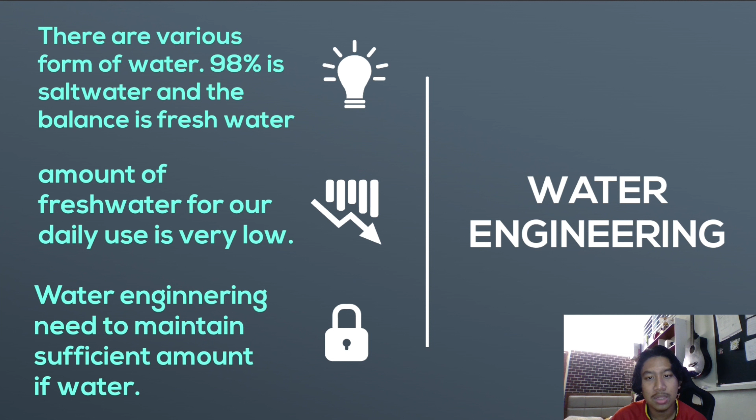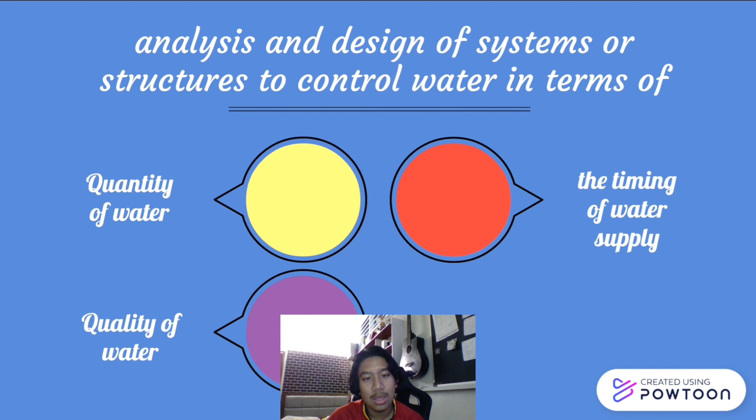Next, what is water resource engineering? It is a field of analysis and design of systems or structures to control water in terms of quantity of water, quality of water, the timing of water supply, and distribution of water. There is a system in water resource engineering able to treat, store, and convey water to where it is needed, when it is needed, and for the purpose it is needed.

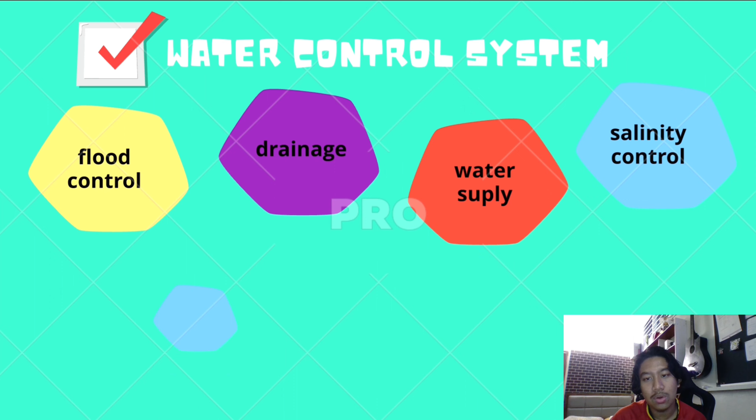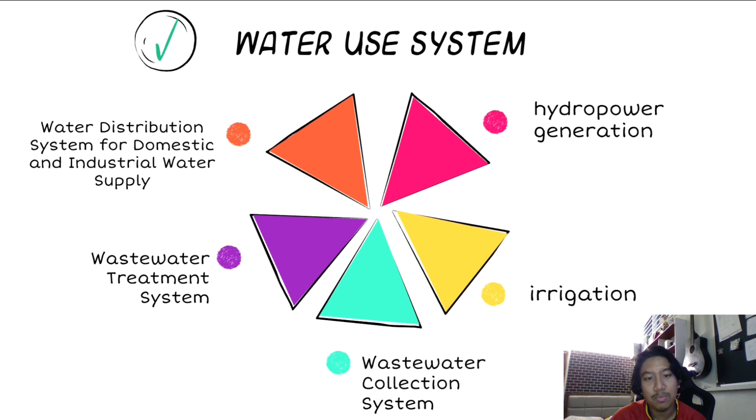These systems are divided into 2 categories: water control system and water use system. For water control system, it consists of flood control, drainage, water supply, salinity control, sediment control, pollution abatement, and ship navigation. Second, in terms of water use system, they manage water distribution system for domestic and industrial water supply, wastewater treatment system, wastewater collection system, irrigation, and hydropower generation. All of these systems are important to gain source of water and maintain the supply of water to residential areas.

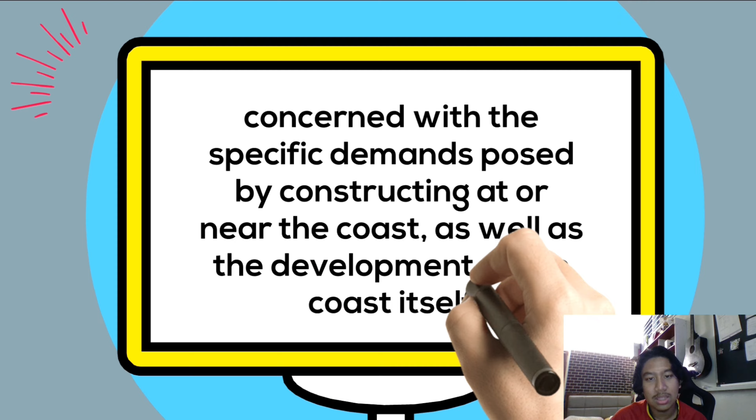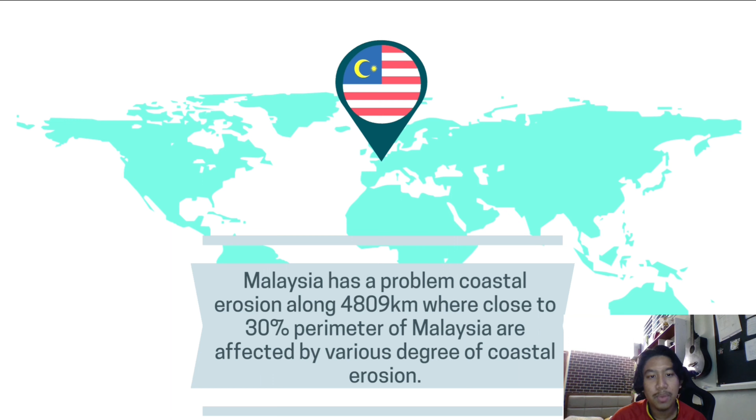Next, the speaker also shares about coastal engineering, which is a branch of civil engineering concerned with the specific demands posed by constructing at or near the coast, as well as the development of the coast itself. Malaysia had a problem with coastal erosion along 4,809 km, where close to 30% of the perimeter of Malaysia are affected by various degrees of coastal erosion. The hydrodynamic impact, especially waves, tides, storm surge, tsunami, and also the harsh environment of salt seawater are typical challenges that lead to coastal erosion, requiring coastal engineers to solve this problem.

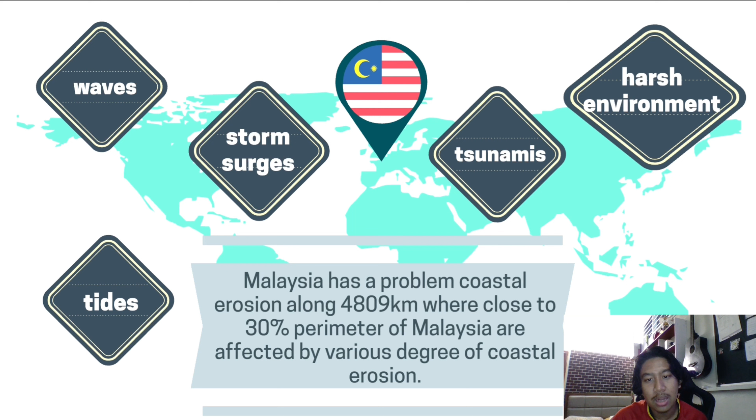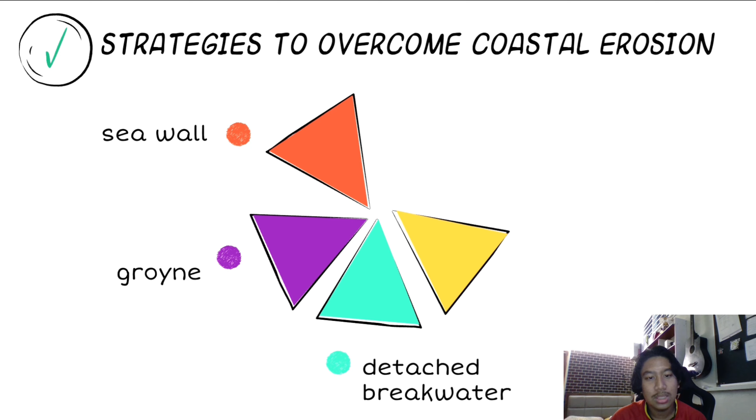There are a lot of strategies to overcome this coastal erosion, such as sea wall, groyne, detached breakwater, submerged breakwater, and beach nourishment.

What is structural engineering? Structural engineering is a subdiscipline of civil engineering in which a structural engineer is trained to design the bones and joints that create the form and shape of man-made structures such as buildings, houses, and many more. Basically, structural engineers are required to design a structure that can withstand the stresses and pressures imposed by environmental conditions and human use. They also need to ensure the building or other structure does not deflect, rotate, or vibrate excessively or collapse, and will remain stable and secure throughout their use.

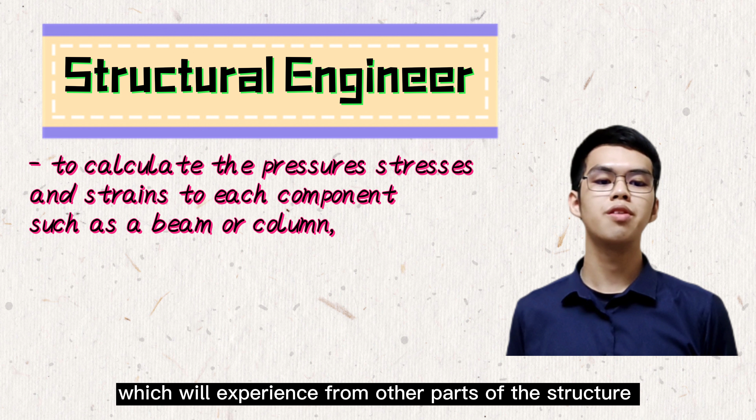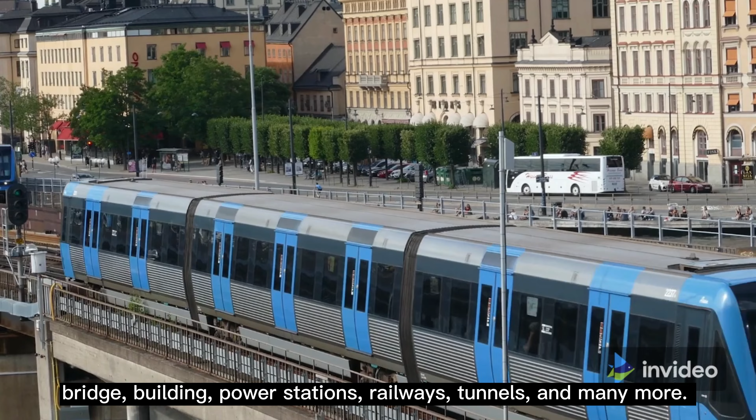Hence, they are required to calculate the pressure, stresses, and strain to each component such as beam or column, which will experience from other parts of the structure due to human use or environmental pressures such as weather or earthquake. Examples of civil engineering structures are dams, bridges, buildings, power stations, railways, tunnels, and many others.

I'm going to share what is environmental engineering. For your information, environmental engineering is a professional engineering discipline that combines broad scientific disciplines such as chemistry, biology, ecology, geology, hydraulics, hydrology, microbiology, and mathematics. It is to develop solutions that protect and improve the health of living organisms while also improving environmental quality.

Environmental engineering is also the use of scientific and engineering principles to improve and manage the environment in order to protect human health, maintain natural ecosystems, and promote environmental-related improvement of human life. Wastewater management, water and pollution control, recycling, waste disposal, and public health are all handled by environmental engineers. They create plans to prevent water infections and promote sanitation in urban, rural, and recreational areas, as well as water supply and industrial wastewater treatment systems.

They study hazardous waste management systems to determine the severity of such risks, provide treatment and containment recommendations, and propose laws to avoid disaster. They put environmental engineering law into practice, such as determining the environmental impact of proposed construction projects.

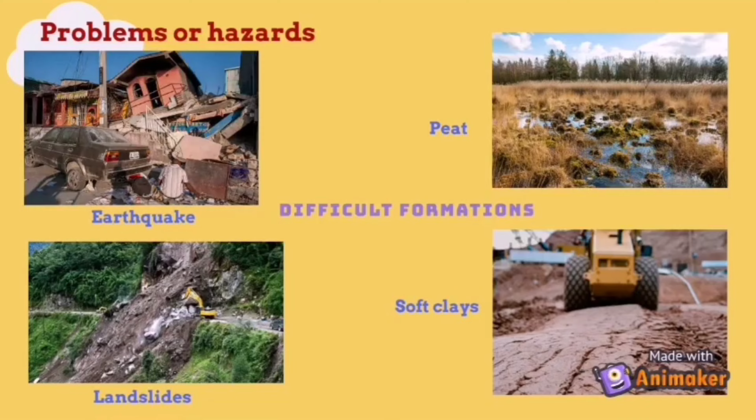From the assignment, I have learned issues of civil engineering related to geotechnical and transportation, such as tsunami, landslide, and transport congestion. Geotechnical issues: problems or hazards include earthquakes, landslides, and difficult formations such as peat and soft clays. The risk of geologic problems and hazards such as earthquakes, landslides, and floods must be translated into project cost.

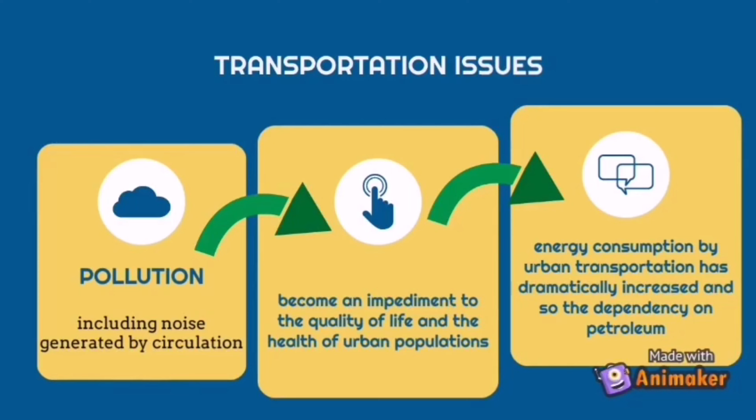Transportation issue: pollution, including noise generated by circulation, has become an impediment to the quality of life and even the health of urban populations. Further, energy consumption by urban transportation has dramatically increased, and so has the dependency on petroleum. I also have studied all the factors and impacts and the ways to solve the issue.

Next, for the assignment of the hydraulic lecture, the first question asks for an example that can give a big environmental impact. So the summary answer is: using fertilizer in large amounts can lead to a huge environmental impact on water-related systems, which is eutrophication. There will be an amount of fertilizer absorbed by soil and flow into underground water. In consequence, the plants and algae underwater will die and couldn't do the photosynthesis process to produce food. Therefore, we should minimize the use of fertilizer in order to protect the underwater ecosystem.

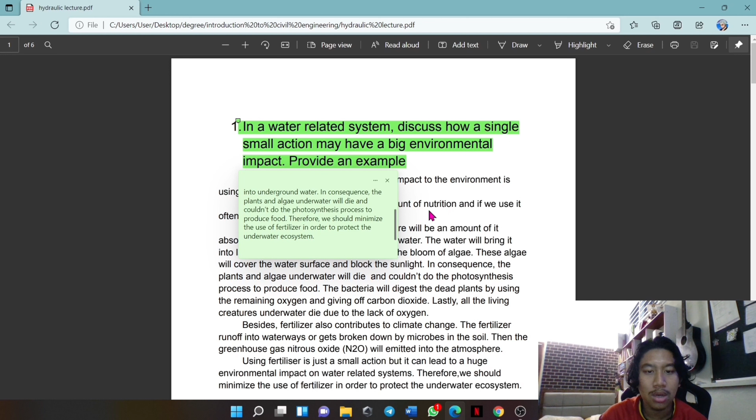Next, second: what human activities can cause problems in watersheds? So the answer is, one of these problems is stormwater pollution. Humans always throw garbage everywhere, and when stormwater comes, it will flow into rivers and oceans. It will harm underwater livings. To avoid the problem, we can set up more garbage cans in public and enforce stricter rules.

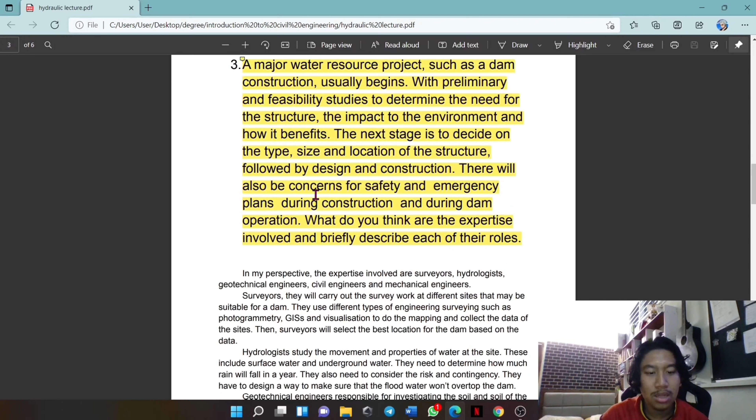Next, what expertise is needed to manage a construction? So the answer is, the expertise involved are surveyors, hydrologists, geotechnical engineers, civil engineers, and mechanical engineers.

Next, state coastal forces and coastal physical features. So the answer is, the coastal forces are waves, currents, and tides. The coastal physical features are coastal bathymetry, coastline features, and sediment characteristics. Basically, these factors will strike the shore sediment and wash it away.

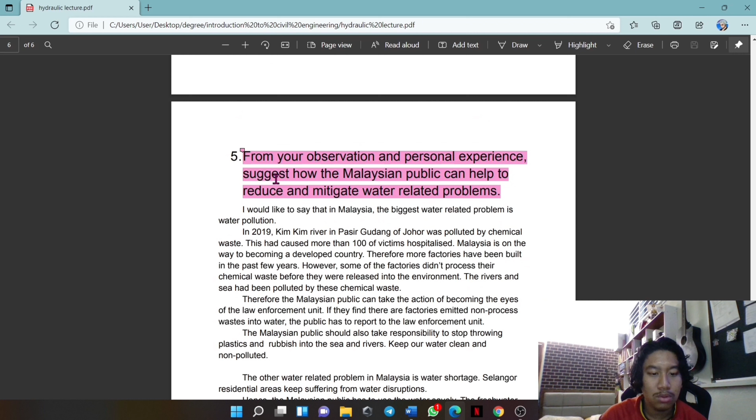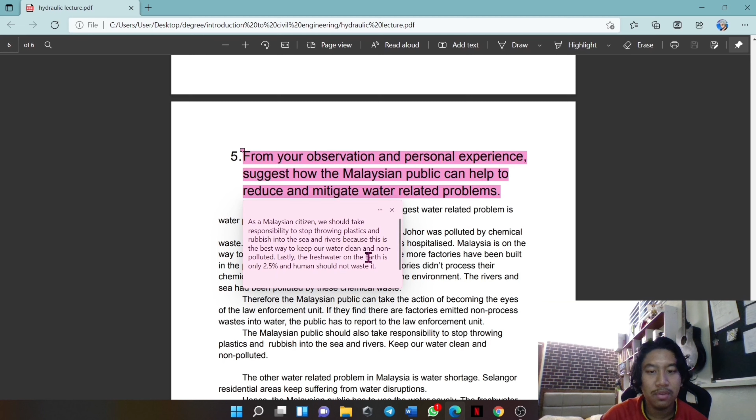So for the last question: how to reduce water related problems? The answer is, as Malaysian citizens, we should take responsibility to stop throwing plastics and rubbish into the sea and rivers, because this is the best way to keep our water clean and non-polluted. Lastly, fresh water on Earth is only 2.5%, and humans should not waste it.

The assignment requires us to find a building in our town which has a 3-story height or higher. We are required to prepare a report which includes explanation of the architecture concept of the building, the structural system of the building, the highlight of selected structural elements with interesting features, material use, and lastly the additional features if any.

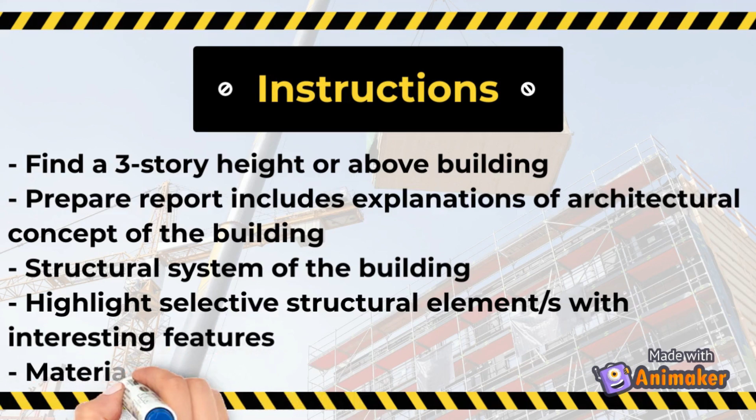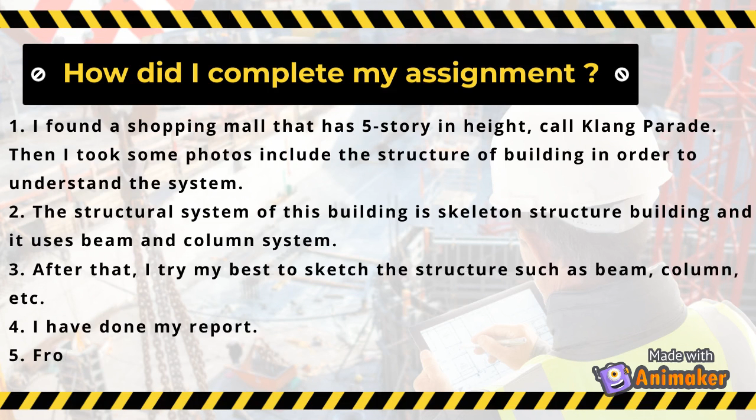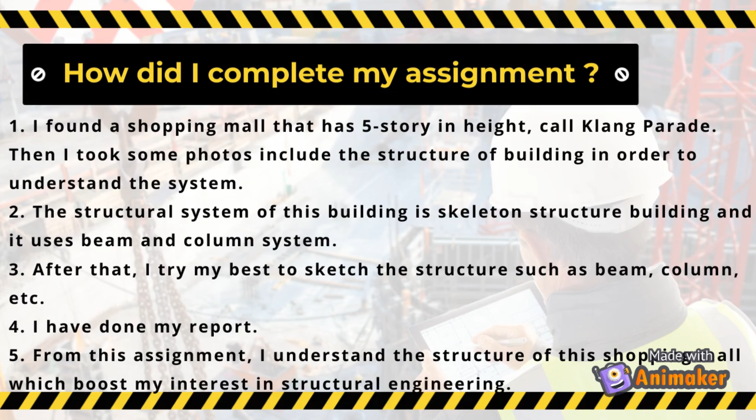Firstly, I found a shopping mall near my house that has 5-story height which is called Klang Parade. Then I took some photos including the structure of the building in order to understand the system. According to my understanding, the structural system of this building is a skeleton structure building and it uses a beam and column system. After that, I tried my best to sketch the structure such as beam, column, and many more. Finally, I have done my report. From the assignment, I understand the structure of this shopping mall, which can boost my interest in structural engineering.

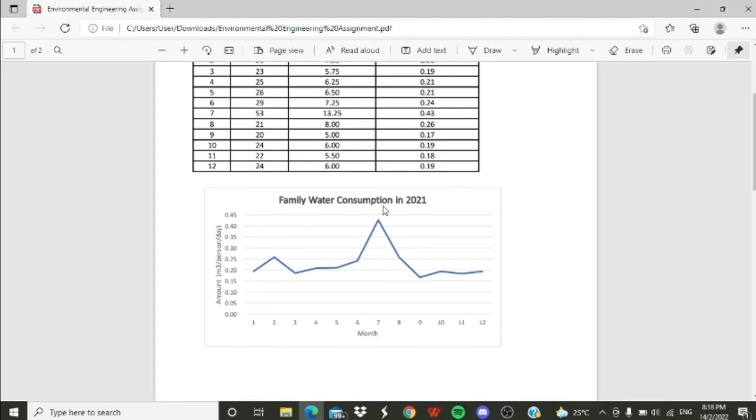For the environmental engineering assignment, we were required to calculate the water and energy consumption of a family in the year 2021. First, for the family water consumption in 2021, there are 12 months. The second column is the amount of water used in a month, and the third is the average amount of water used by a person, which is the average amount used by a person in a day. We calculate all this, and based on the final column, we can construct the graph of the family water consumption in the year 2021. We can see that in July the water consumption is the highest, and in September it is the lowest. This is the daily usage graph.

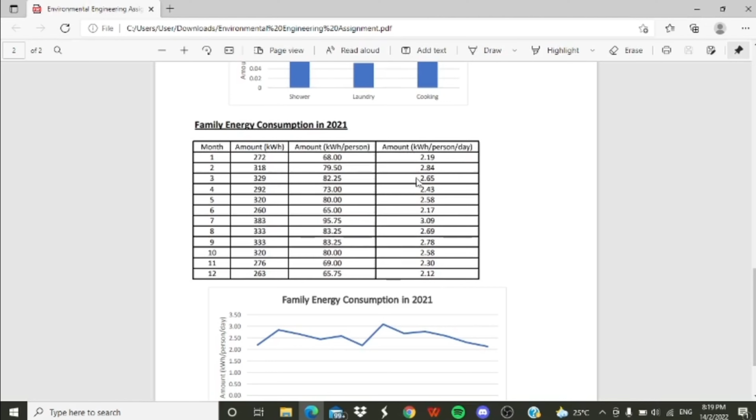The next one is the family energy consumption in the year 2021. There are 12 months also, with the amount used in a month, and the average amount of energy used by a person in a day. Based on this column, we can plot the graph of the family energy consumption in the year 2021.

As a conclusion, from these 4 assignments, we can understand the geological, geotechnical, and transportation issues of civil engineering, such as landslide, tsunami, and transport congestion. As a future engineer, we can understand these issues early and try to prevent them from happening.

Besides that, from assignment 2, Introduction to Water Resources, we learned a lot of things. For instance, a single small action like using fertilizers can cause a huge environmental impact on the water-related system. This is due to fertilizer containing a high amount of nutrients which the soil will absorb, and lastly it will flow into the underground water and into the lakes and rivers, causing environmental impact.

For assignment 3, Introduction to the Structure and Materials of Buildings, we understand the design structure of a building, such as using skeleton system, beam, and column system, and also the purpose of its design, either for nice looking or for load distribution.

Last but not least, in the last assignment we got to know our family's water consumption and how much water we use for cooking, laundry, and showering, and also the power consumption. Hence we are able to save water and energy since we know which part uses the most, such as shower. We should shower with a shower head in order to save water, and also we should only turn on the aircon if the weather is really hot.